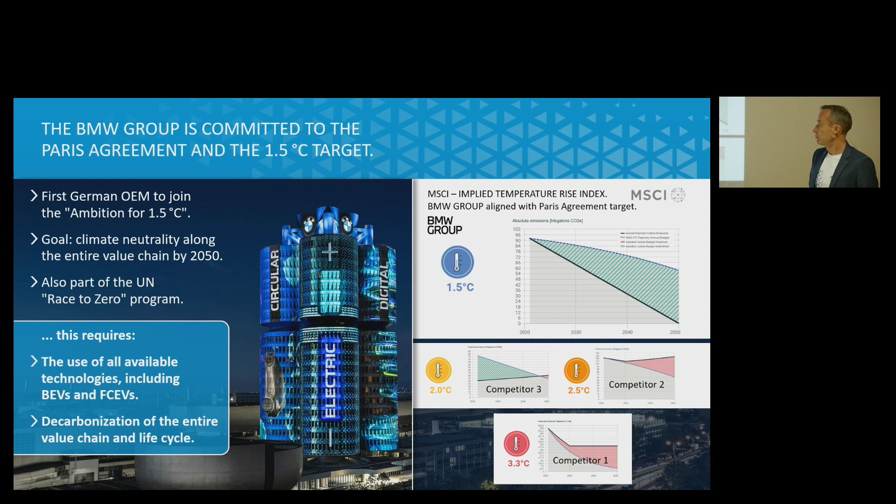I take some here. These could be some car manufacturers from the Stuttgart area, or Chinese, or from California. So we at BMW are on track, and we are doing our measures very credibly to reduce the CO2 footprint and to reduce raw materials usage.

So let's come to a short view. My speaker before already mentioned this. We see in the total big picture that it is smart to have more solutions than battery electric cars, because it may not be possible to supply all energy with electric power directly from renewable sources. We think a storage element would be necessary, which could be hydrogen.

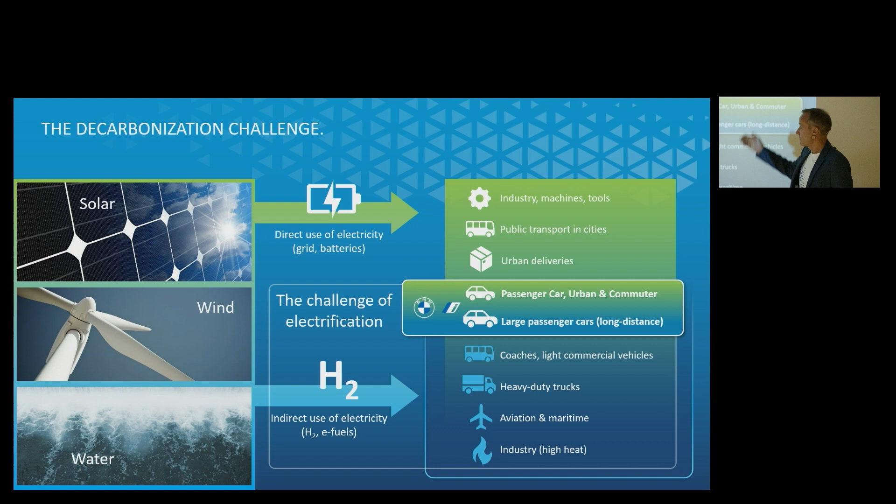Hydrogen makes it possible to transport energy over long distances and to store energy in huge amounts, and with this indirect use of electric power, hydrogen will exist, and in the best case, to reach profitability, hydrogen should have a lot of applications. And we think the mobility sector should also be an application of hydrogen, because one of the answers is given in the next slide.

Of course, the mainstream here in green color is battery electric mobility; we think the passenger car fits perfectly for battery electric mobility. However, the heavy duty sector will maybe need more solutions to reach the goals, and the fuel cell technology here in blue color is a sign. It is smart to have maybe the fuel cell technology.

Some points I want to highlight here. The heavy battery will reduce the possible load, and the charging time will reduce the driving time. So from the total cost of ownership, it's very interesting to take also the fuel cell technology into account. And if this will happen also in perspective of infrastructure, etc., then it could be a very good niche also to offer this technology in the passenger sector.

We then maybe can offer the supply chain, the economy of scales. The cars have more figures in sales, and so we can go hand in hand. It's like a team sport to enable more technology, to find in the big picture the optimum for all. So we at BMW think that would also be here a niche or a future niche for the fuel cell technology, and why we think this.

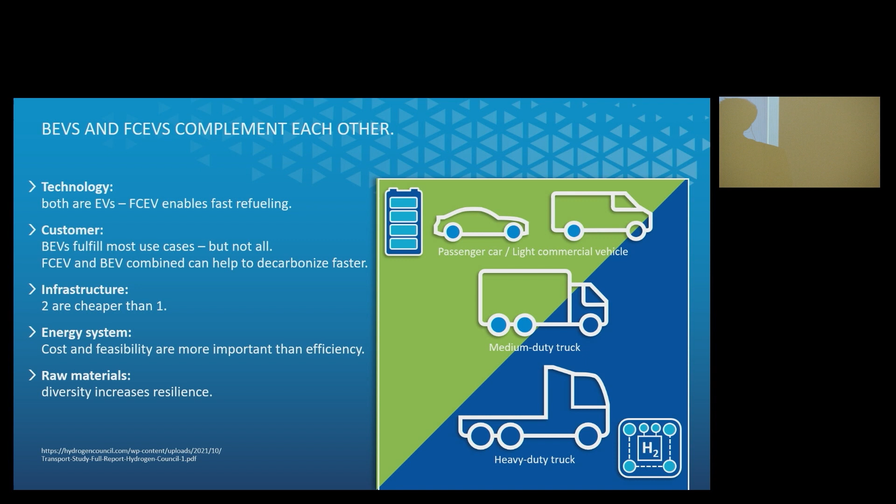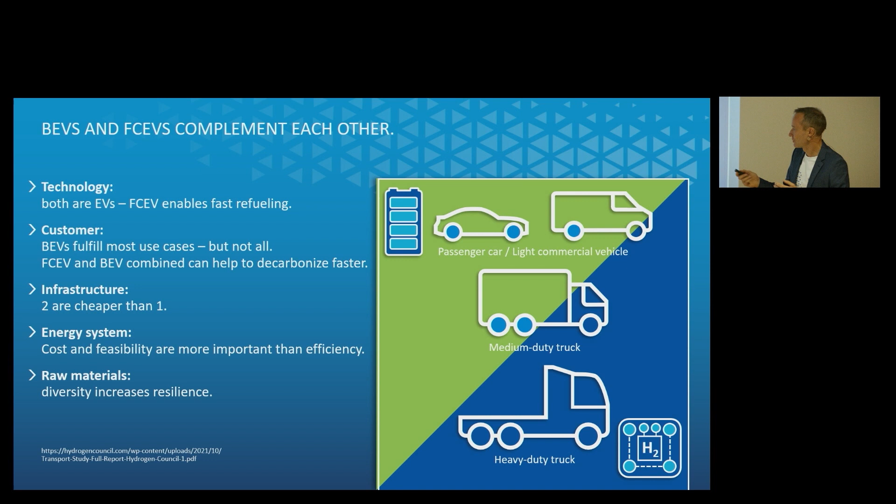You see here the agenda, my personal agenda for the next slides. We think it will be a good solution to have the fuel cell in addition to battery, from the technology perspective, from customer perspective, for infrastructure, for an energy system, and from the raw materials. And after this, I want to invite you to go inside the car. How will this technology work?

So, from the technology side, I mentioned it already on my first slide. We think both technologies will, in the best case, have a lot of synergies together. We want to use the same electric engine in the car. And in the next step, you see here the battery electric car, and here a schematic view of the fuel cell electric car. The hydrogen tanks currently look like that. You have the hydrogen tank in the middle, and here it's like a T shape.

And when we adapt the geometry of the hydrogen tank so that it could fit in the same space where the battery is integrated in the car, then we have a flexible, synergetic car architecture, and the customer and the market can decide which technology they want to use and fits best to their requirements. And for us, then we have reached the step to be profitable. We use a lot of synergies together, and then can also offer this technology.

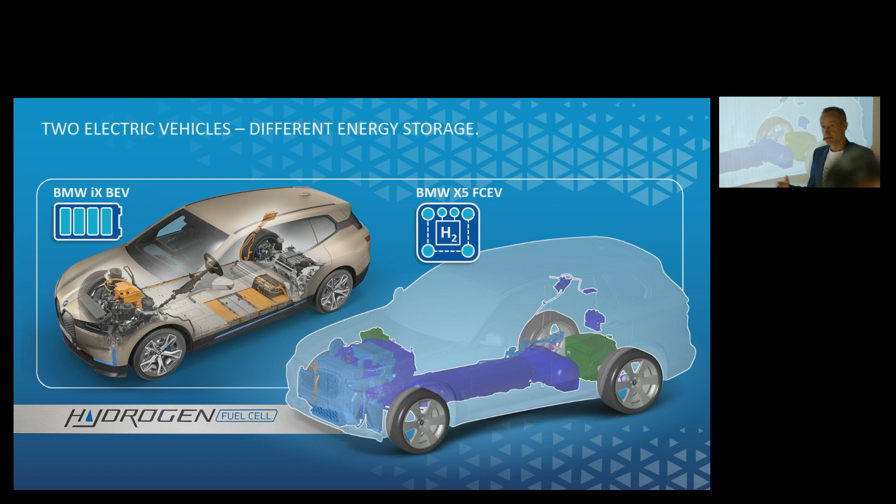People love to do the same things at the same time. In Bavaria, the holidays are beginning, and we all meet at the Irschenberg highway station to refuel, buy the pickle and continue the ride to Italy. And when you take into account that we all want to refill the car with energy at the same time, then we have waiting time, etc.

And time for us is very valuable, and especially for BMW customers, I think, they want to have good solutions which allow them to be free and flexible, to make a rest when they want to make a rest, and not because the car needs a rest for charging time. So those are some arguments why we believe we need more solutions than battery electric.

And also in cold climate conditions, this powertrain is very robust, so you do not lose range in cold conditions. Or when you love to take trips with towing, it's also a smart solution, since you have the opportunity of fast refueling. Or take the driving assistance systems, the automated driving: they have a lot of sensors and actuators that need a lot of energy. If the customer wants these driving assistance systems running, you will need a lot of energy on board. And if you can refill this energy very fast, it's also very comfortable.

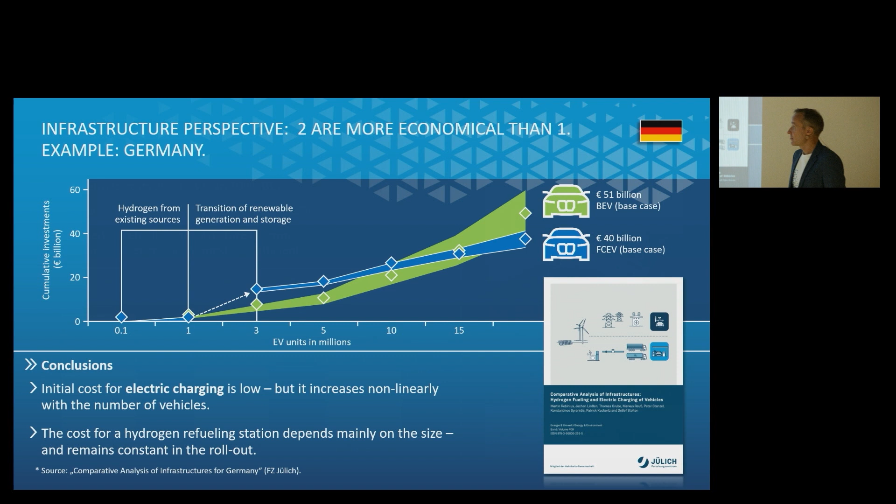And if you mix two infrastructures in the system, with the hydrogen refueling infrastructure in addition, then the analysis shows it costs the whole society less than standing on one leg and building all-electric vehicles and charging infrastructure for all mobility. And we have done the same analysis not only for Germany; we have done this also with Hydrogen Europe, the Clean Hydrogen Partnership, and the McKinsey guys analyzed this. The figures are not so crucial at the moment; the trend is the main message.

So if we have a low scenario with hydrogen mobility in addition to only BEV infrastructure for all European vehicles, the message in Europe is also that hydrogen in addition to battery electric mobility will reduce the total costs for the system. And also in China we have done this analysis, so two infrastructures are cheaper than one.

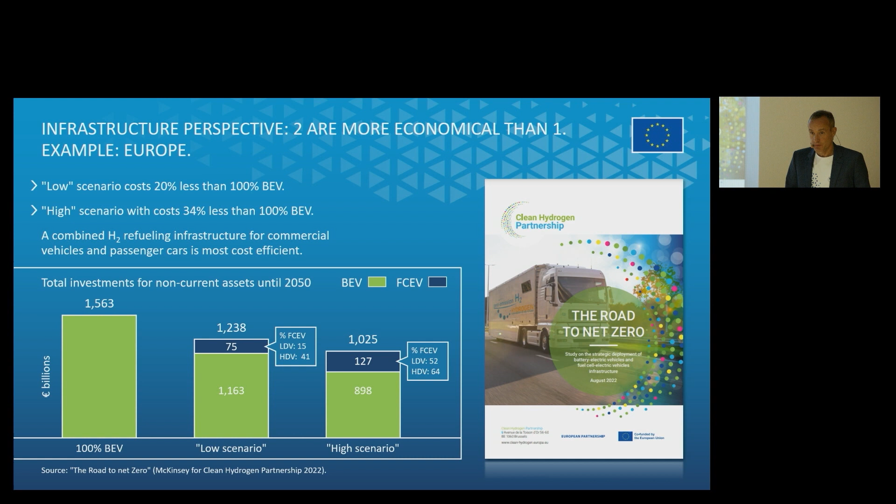What is the situation nowadays? In Germany we have around 100 hydrogen refueling stations, in Italy one. In America, the focus is nearly totally on California. And in China, there is huge momentum and a huge ramp-up in hydrogen infrastructure. The government has also observed this technology and expects it's a technology race here. Huge energy companies like Sinopec are willing to set up hydrogen infrastructure to find out if this is a future business model for them.

And South Korea and Japan have a long history in hydrogen. They have a hydrogen society. They already have the Hyundai Nexo and the Toyota Mirai passenger cars on the market. Okay, and you see this. You can ask BMW, why are you not selling the car? The answer is also, it is not profitable from the car side.

I mentioned the car architecture needs special adaptation of the floor to integrate the hydrogen tanks on the one side, but on the other side, the environment. We need a hydrogen infrastructure network which works. In Munich, we have only three hydrogen refueling stations. Five years ago, we had five. Now we have only three, and this will not work for the customer. And our passenger customers love to drive to Italy, to Portugal, to Spain. So taking all of Europe into account, it's too few.

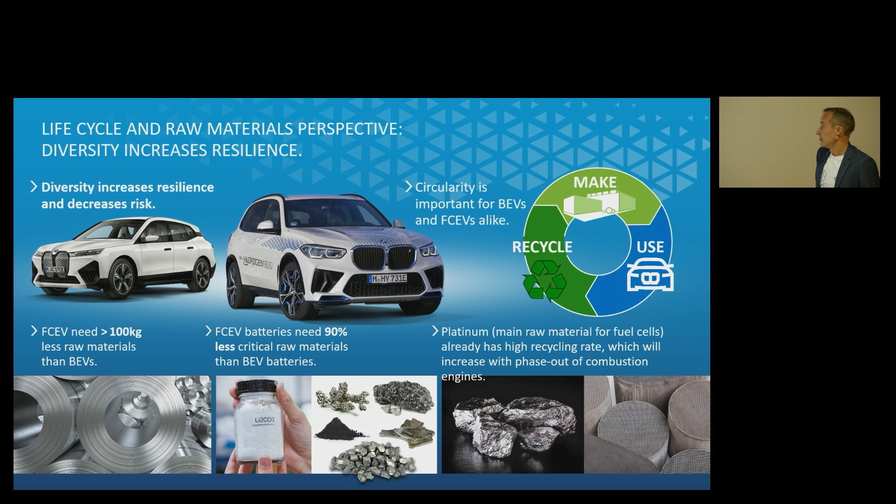To look closer: fuel cell electric vehicles need fewer raw materials and also fewer critical raw materials. In a fuel cell, you need platinum, and here is an option. You can use secondary material from the combustion engine catalytic converter, and then it is like a circularity of these materials used in that car. And this is very interesting also from this perspective to enable this technology.

Where we are now, we have launched this pilot fleet. And we have shown here you can integrate this powertrain in a normal car. The technology is very performant. We have more than 400 horsepower on the road, and the technology is mature.

So we have done the summer testing in the south of France several times, the winter testing in Sweden, or the Alp testing, etc. So we have done everything which is necessary, crash tests, etc., to have here a series product. And we want in the next step to enable this technology in a commercial product.

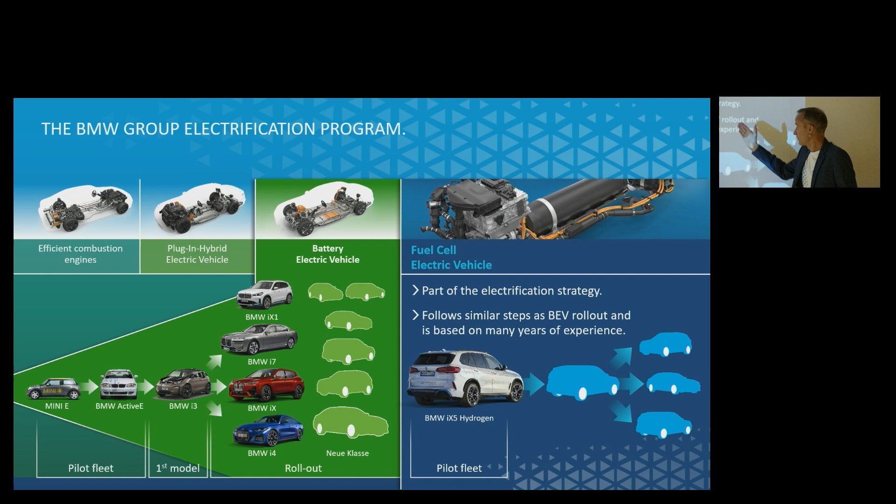And then, some guys see analogies to the battery electric cars in the phases we are. First, BMW have done the pilot fleets, and then the first model with the i3. And the technology was enabled, and the market conditions developed very well. And then we have been able to bring several products in all BMW classes. And that could be the way we can go here in these phases, also.

By the end, as I mentioned, it's an electric car with great acceleration, zero emission, and I'm very proud as a developer engineer. It's really a smooth and a silent ride. You have no difference from the battery electric car, and with this asset, you have the fast refueling.

How does the powertrain in the car look? Under the hood, you have the fuel cell system. You can offer 125 kilowatt continuous performance from the full to the empty tank. Then you see the hydrogen tanks, approximately 6 kilogram hydrogen we have on board. Hydrogen is measured in kilogram. You can calculate around 1.2 kilogram per 100 kilometer driving.

And in the back, you have a power battery, which can add power to the fuel cell performance up to 170 kilowatt. So in total, we can offer 295 kilowatt, which means 400 horsepower. This battery is not an energy battery. It's a battery with very little energy. It is specified to offer power when the driver needs additional power. And it's not a battery for external charging. So this battery is for the system optimization.

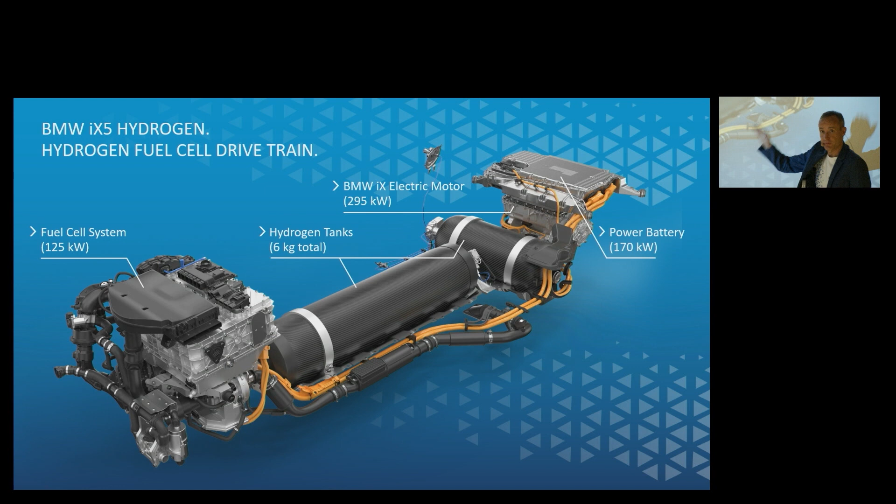Okay, I go on. So maybe interesting for you, one single fuel cell is a very thin plate, like a computer keyboard from the dimensions. On the one side, hydrogen is flowing, here in blue, the molecule. The molecule divides at the catalyst. The electron goes away, it's the electric energy, and the proton walks through this mesh and marries on the other side with the oxygen here in red, and the byproduct is heat and water vapor.

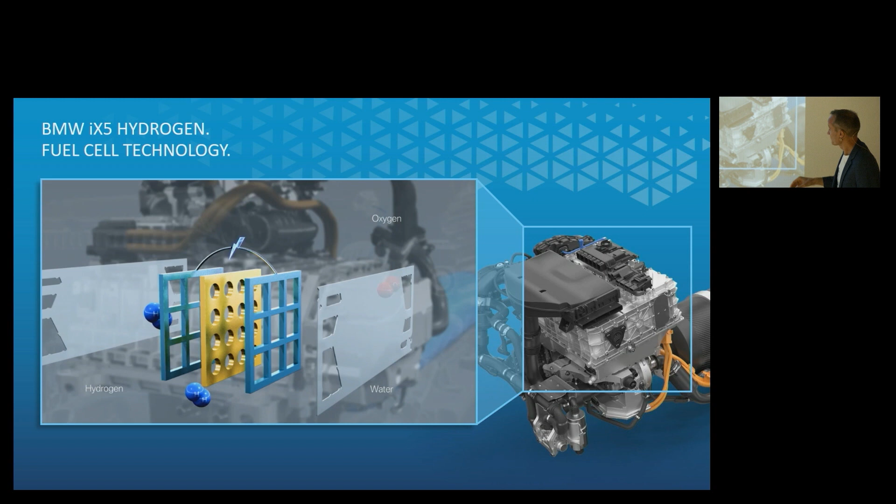So it's an electric car where water vapor will come out, and several hundreds of these single cells are integrated in the fuel cell stack, and the fuel cell stack is here. The system needs also a recirculation booster, so that hydrogen will come again and again to the fuel cell. You need a humidifier to optimize the process, to make the air from the environment a bit more humid. And this will operate here under the hood in the fuel cell system.

And by the end, we think hydrogen will become a part of the future sustainable energy system. We think the hydrogen fuel cell technology can make a very valuable contribution to achieving the sustainable goals, meeting the customer needs, and diversifying the dependencies. We have achieved a high level of self-empowerment with this pilot fleet, and now we want to meet the customer and create enthusiasm for this project, and go to the next step.